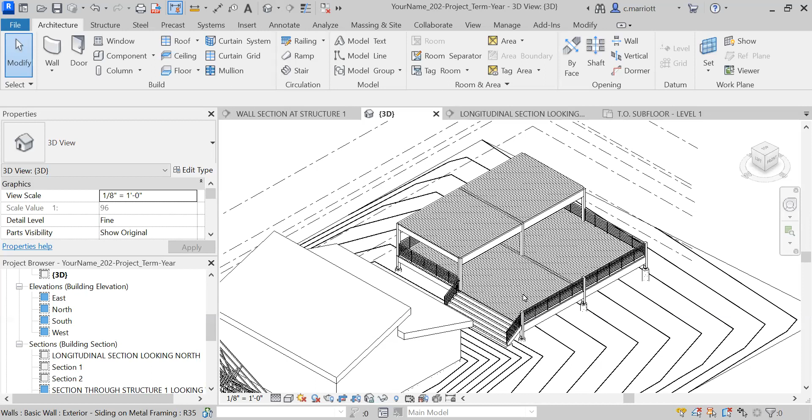In this video, we'll continue to work on the structure that's framed with heavy timber. We have a deck placed on top of the structure, but the deck has open joints. So if this is going to serve as some kind of cover, we need to put more within that roof assembly to keep the water out.

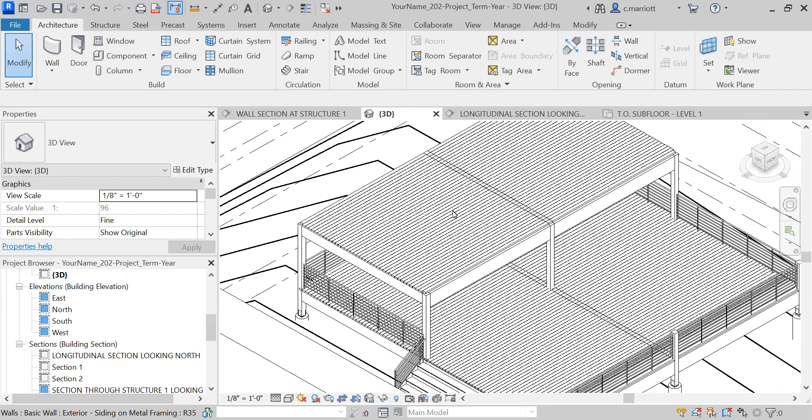So what we're going to do is add, instead of a steep roof, now remember, there are minimums for the slope to qualify something as a steep roof. Like a 3 to 12 technically is a steep roof. And with that slope of roof, you could put some kind of shingles. If you're going to go with something that's flatter, you would change materials for the roofing type. It's frequently more of a membrane that's placed on top of the roof.

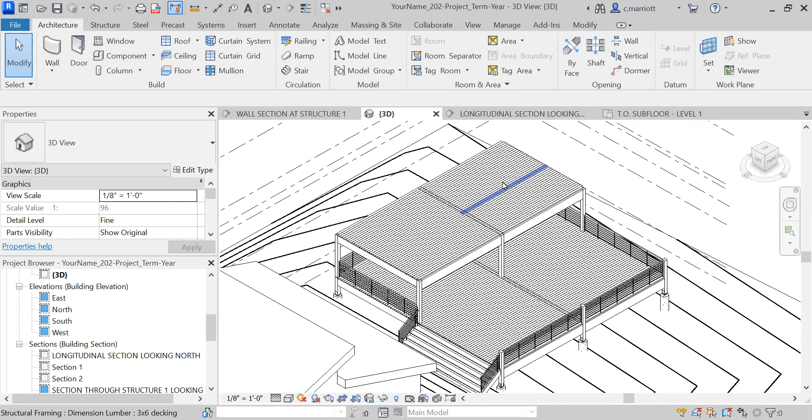Sometimes if you have a low slope roof, you might have drains located, let's say, in the centers, and the roof would be pitched, not a lot, but perhaps 1/4 inch per foot towards those center drains, which would then gather water and provide a path for it to get out to grade.

In our case, we're going to do one of these low slope roofs, but instead of having center drains, we're going to run a gutter along this edge here. Okay, so we'll build up a roof at a very low pitch, and we will create a detail at the edge here so that the water can fall into a gutter and down a downspout.

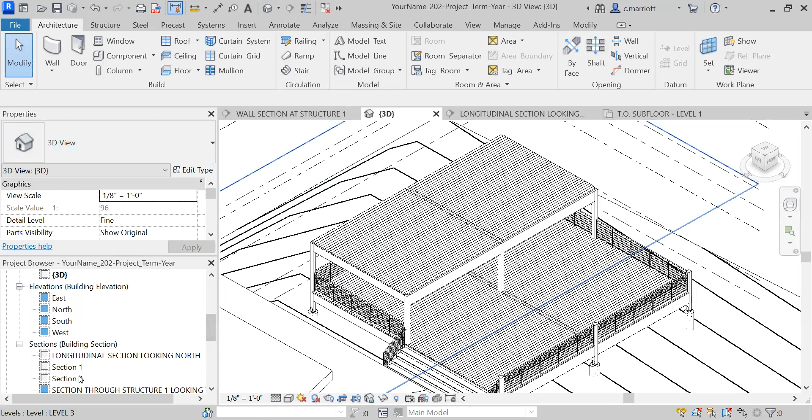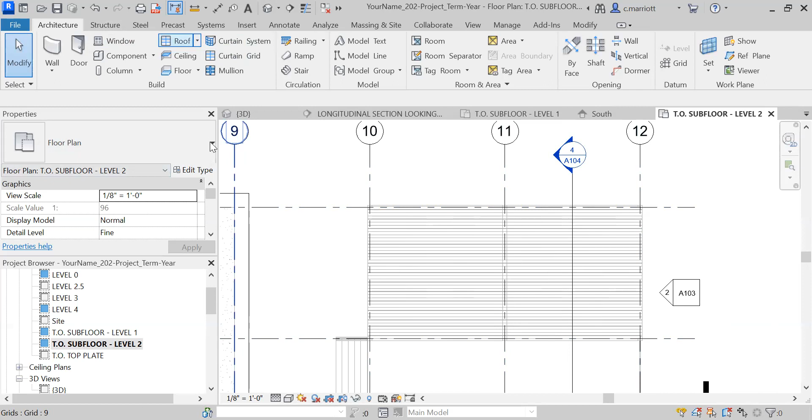All right, so first thing I'm going to do is go up to my level 2 plan. Let's see here. It's called subfloor level 2, but we'll make those adjustments soon. So I'm going to zoom in. I'm just putting the roof over this portion of the structure. I'm going to go to roof, and there's a few that we had already been working with.

For this one, I'm going to start with a 9-inch generic. Let's see what other ones we have as options. Yeah, we can try this generic one, and I'm going to edit the type, and I'm going to duplicate it, and I'm going to call it low slope roof. And I'm going to start to modify the structure.

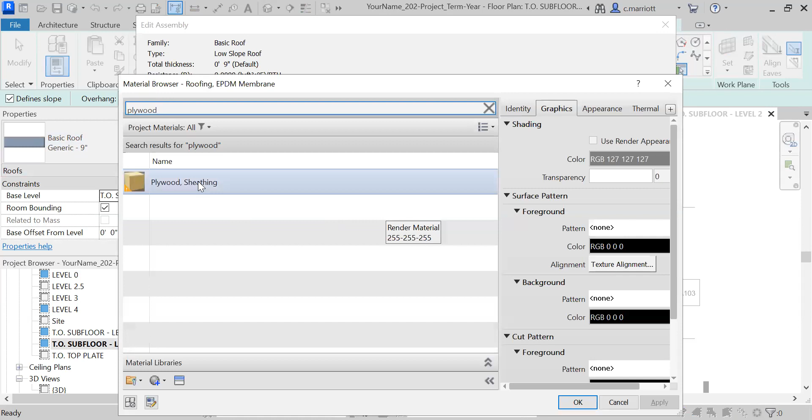The only material I'm going to put in here is going to be a layer of plywood that will serve as the base for our roof here. Okay, and I'm going to give this a thickness of 0.75 inches, so it'll be 3/4 inch plywood. Now we'll be adding other components to this, but we'll handle this at the detail level. So I'm going to click on OK.

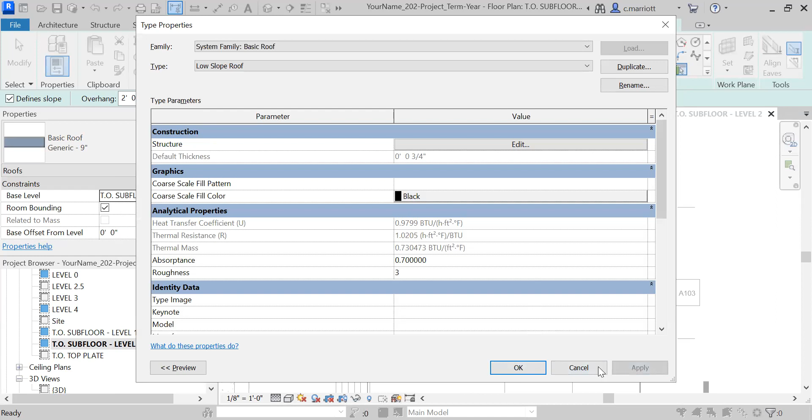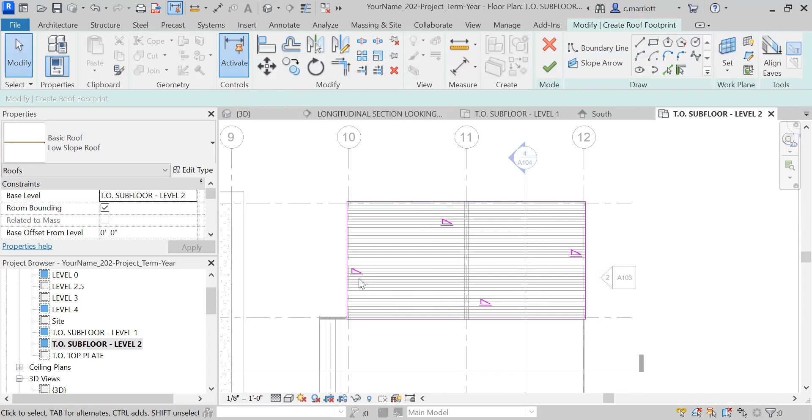And apply and OK. Right, now I'm ready to create the boundary line, and I'm going to click on a rectangle, and I'm going to snap to the outer corners of my posts. Okay, now as we did with the other shed roof, we want to establish some settings for the pitch. It's going to be at its high point along this edge, and it's going to slope down to this edge here. So this one here is the one that's controlling the slope proportions.

It's a 9 to 12 right now, and I'm going to make this, again, this is a low slope roof, so only 1/4 inch per foot. Apply, and then I'll go around and I'll remove the check mark so that I have basically a single slope roof.

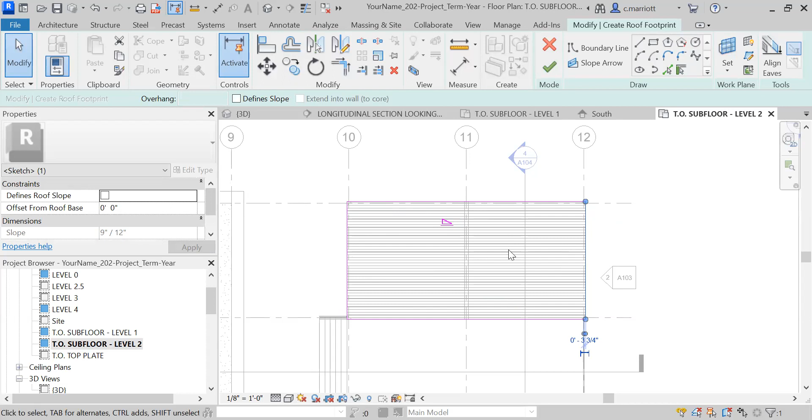Okay, now we'll make another change to this, but before we do that, I want to look at it in section. One other thing that I'd like to do: we have a section cutting through here, and we have sections that are cutting through these two as well.

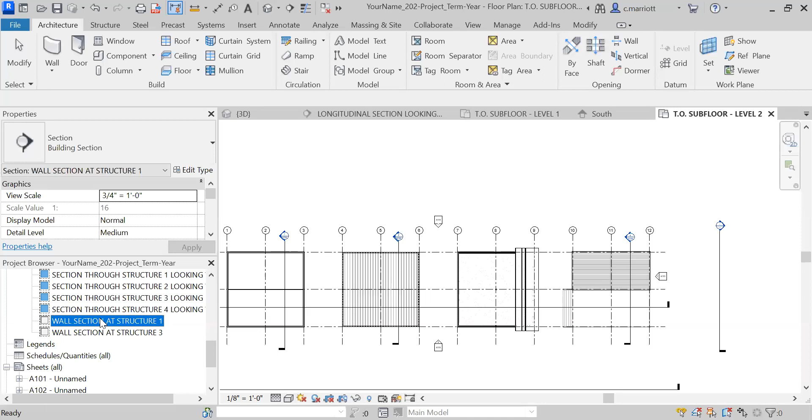And if you recall, when we did these sections, they're looking west, but my wall section is this part of the wall right here. So I try to be consistent with which side the exterior side of the wall section is. So just to illustrate this a little bit more: when I go to the wall section here, the exterior side is on the left. The majority of the notes are on the left.

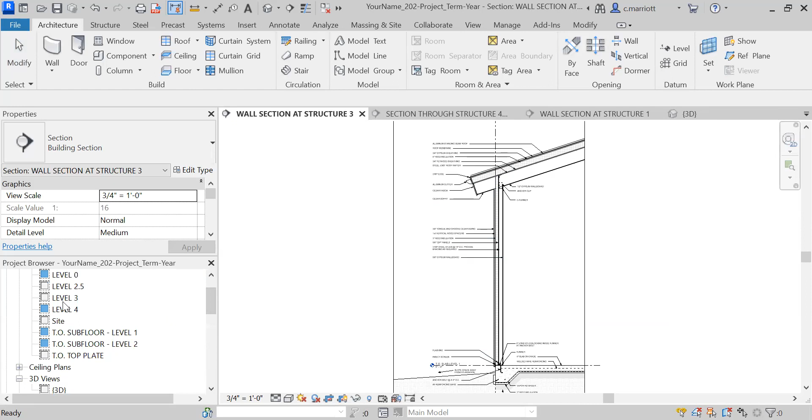When I go to wall section structure 3, again, the majority of the notes are on this exterior side, which is on the left. So let's go back to level 2. I want to make my wall section here because this is where I have the roof structure. But if I was to keep the section looking west like this, it's going to put the exterior side on the right.

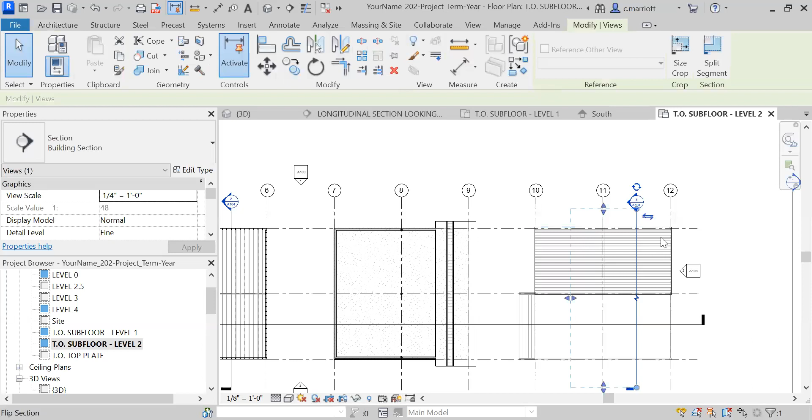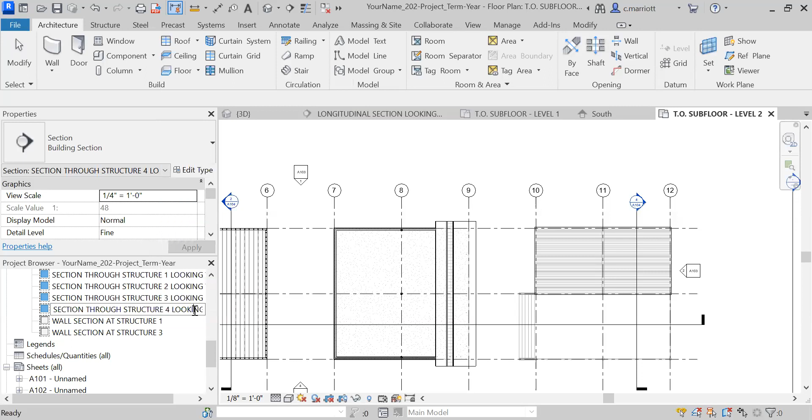So to be consistent, I'm going to click on this and I'm going to flip it by clicking on these 2 little arrows. So now this one is going to look east. So just so I don't forget about this, I'm going to go to the section through structure 4 looking west, and I'm going to rename it looking east.

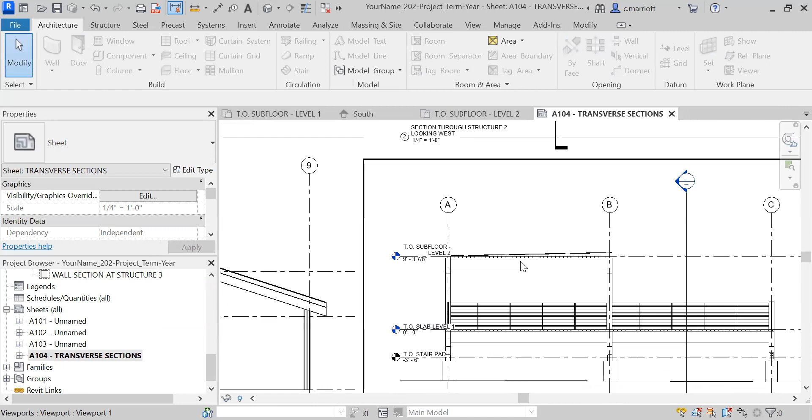Okay. And let's go ahead and look at the transverse section here. So what I can see now is in this section, in this sheet, the roof is pitching towards the north, which is what I want it to do. And I'm looking towards the east. And I can go to the section itself and I can see this.

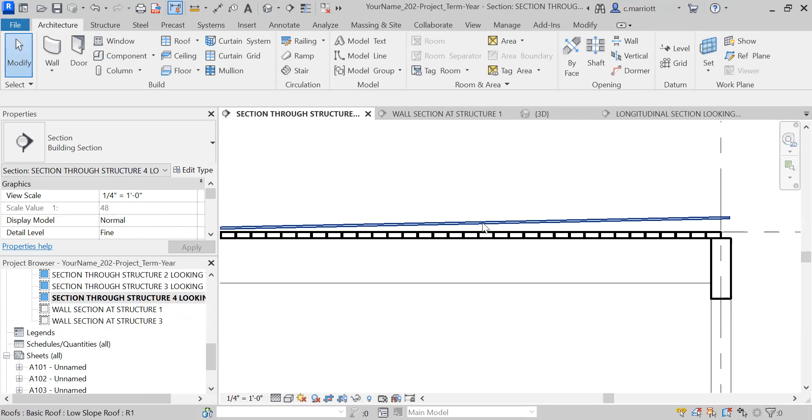All right, now, this is a very low pitch roof, 1/4 inch per foot. This would be common for any kind of what we would consider flat roofs. It needs to have enough pitch that water doesn't pool on top of the roof. But one thing I want to change is the relationship of this plywood to this deck material here. The deck is going to be exposed from the bottom.

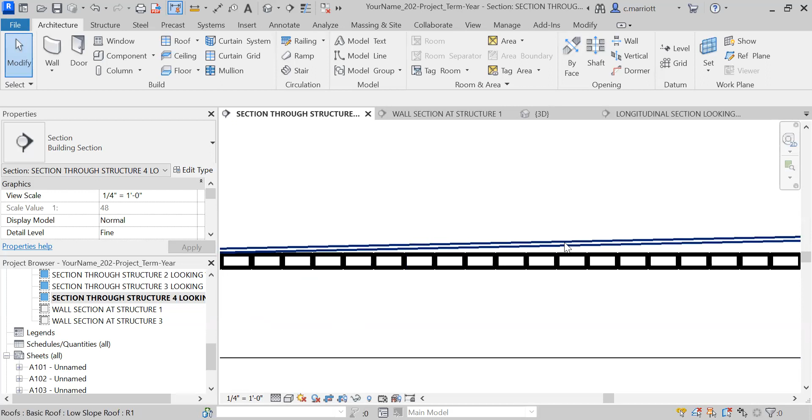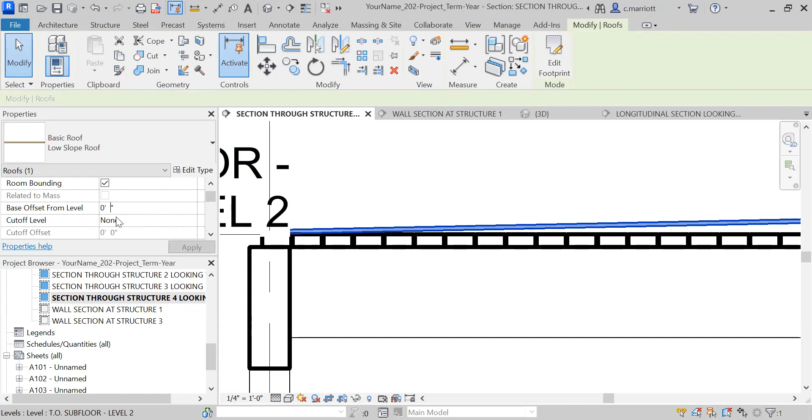The plywood will sit on top, and that's what's kind of establishing a surface for us to put a membrane in there. But I need something to prop up this plywood. And so what they would normally do is cut pieces of wood in this long direction with a taper of 1/4 inch per foot. Okay, so what I'm going to do is click on the roof here, and I'm going to offset it from the base 1.5 inches and apply that.

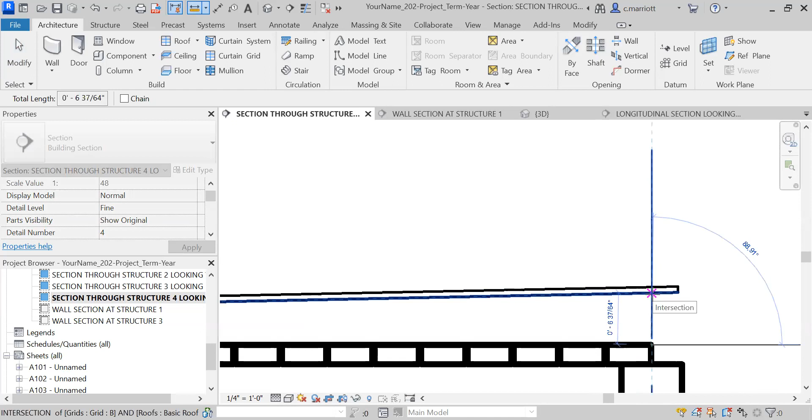Okay, so now these tapered wood pieces are starting at 1.5 and then pitching upward from there. So when I come over here to the far side and I measure this, 6 and 37/64. So probably with 2x8s, I could create this pitch by cutting the piece of wood in a tapered configuration.

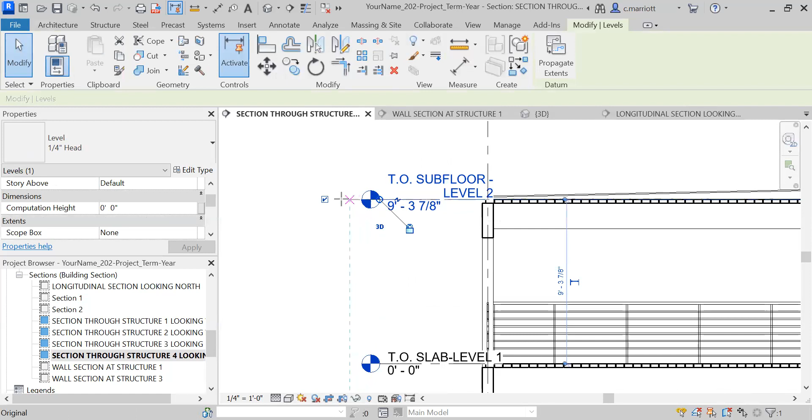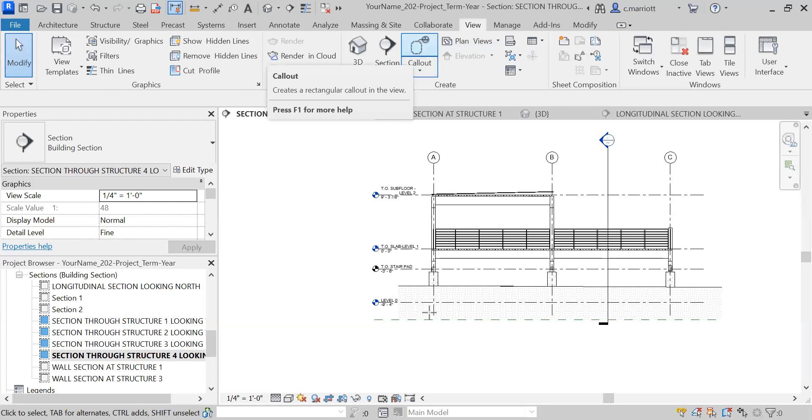Now I can begin adding some more detail to the wall section. What I'm going to do is pull these datums out a little ways. Right. And I may need to bring them out a little bit more. I have these piers that go below ground to level 0. And next, what I want to do is prepare a new wall section. So I'm going to go to view and callout, and I want to get that full pier and a little bit of space on the left here so I can add my notes.

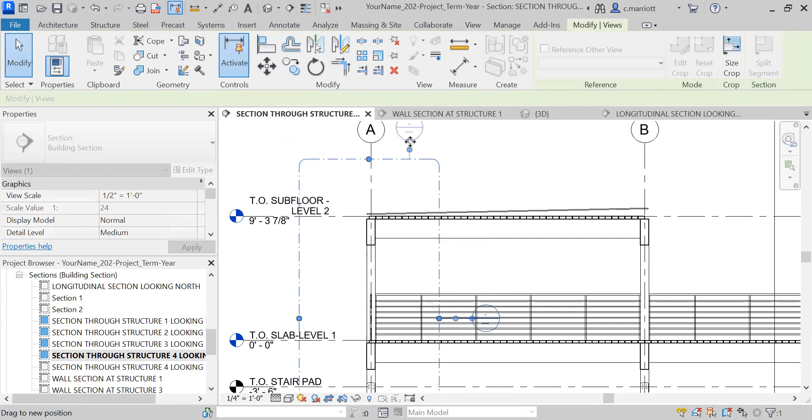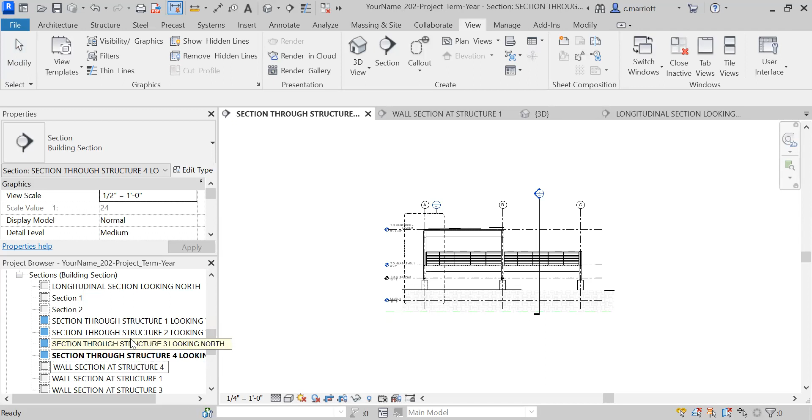And I'm going to come up to the top here, click on the bubble, the callout tag there, and bring it up so they're consistently located. And what I should see is there are now 2 with a similar title. I'm going to call this wall section 4. And here is where I will begin to add more detail.